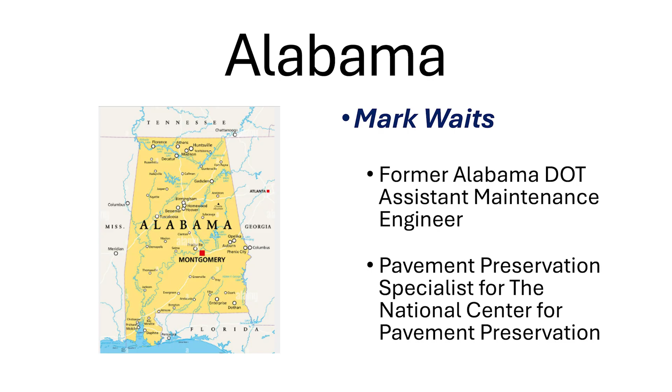And I am Mark Waits. I'm a former roadway maintenance engineer, assistant engineer for the Maintenance Bureau. My responsibility was over all the roadways in the state of Alabama. That includes everything: vegetation, welcome centers, rest areas, you name it, but mainly the roadways.

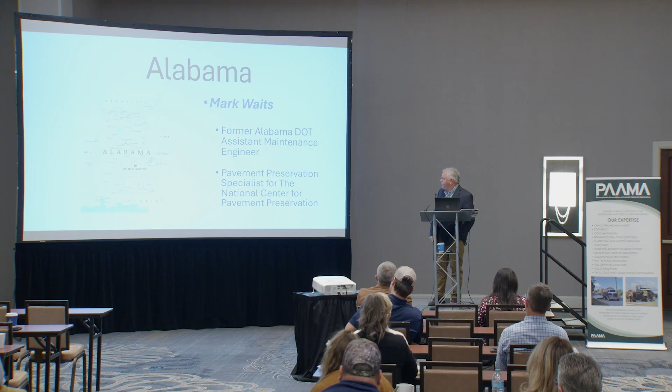So why preservation? What are we in here talking to you about today? Pavement preservation?

When I took the job in 2013, as I said, Alabama really did not have a pavement preservation program. We had a pavement preservation policy, and I'll get to that in a little bit, but we really had no program. I took this job, and you can see the date right here, it's March 20th, 2013, when this article came out.

I walked right into our chief engineer's office, and he said, 'Mark, the director's got this report right here, and he's not happy with it. We've got to do something.' I'm going, 'What report?' And I get to read this article right here, and there we go: 1/4 of the state's public roads are in poor or mediocre shape. I'm going, uh-oh, what have I walked into?

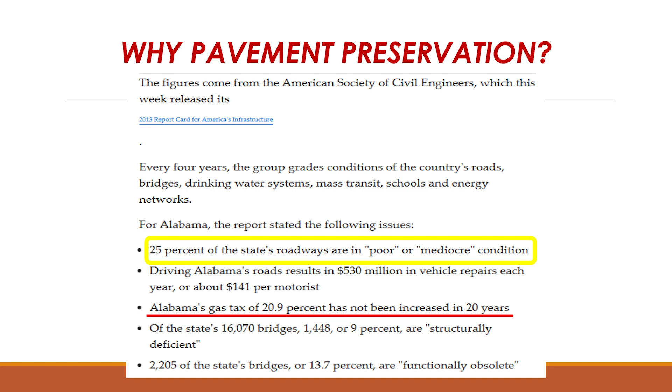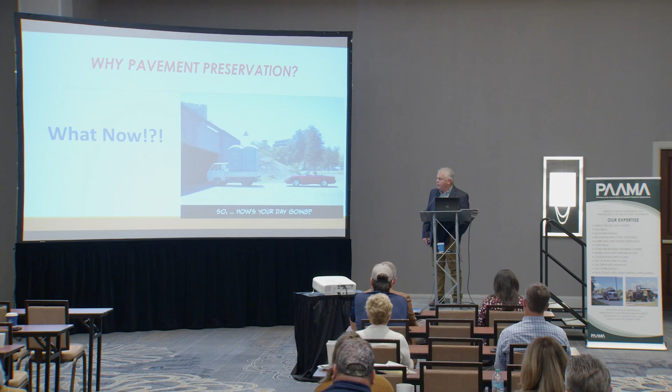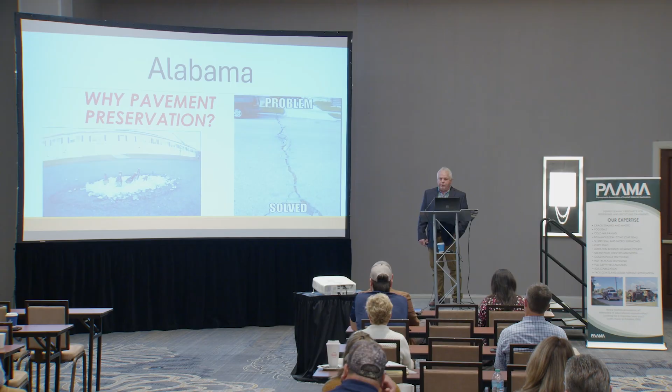So I had to decide, what do I need to do now? Do I just stay on the same road and hope that something bad doesn't happen? Or do I need to make another plan? Could I put a Band-Aid on it? Just get it through for my little short time that I knew I was going to be there, the next 5 or 6 years? Or could I just sit back and chill out and see what happens?

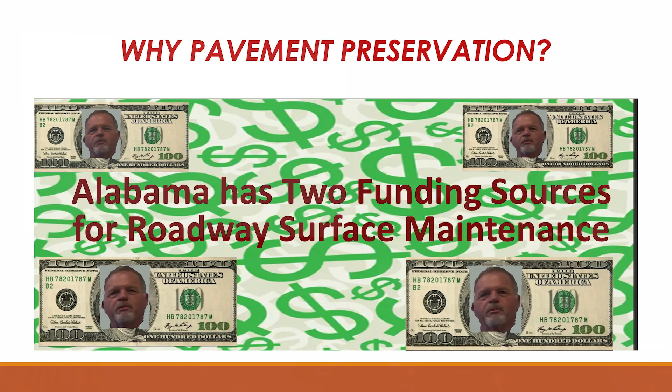Why pavement preservation? You know, the first thing I learned a long time ago is it takes what to make something happen, right? So it actually takes money to make stuff happen, doesn't it?

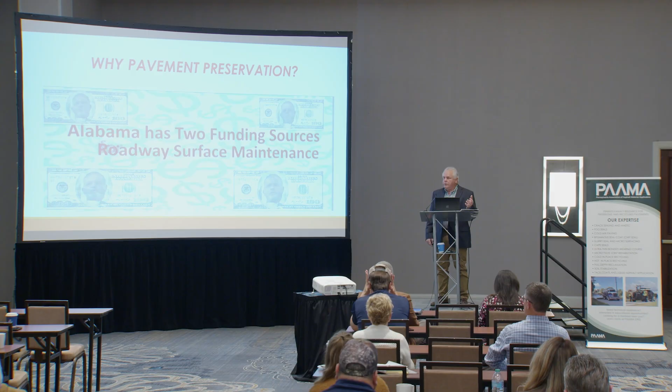Well, as a state agency, how many people here have ever been in a state agency? It takes money, right? And you've got to figure out where the money's coming from and how much you have. We actually had two funding sources for me to do the job I'd been assigned to do, and it had been level funded for several years.

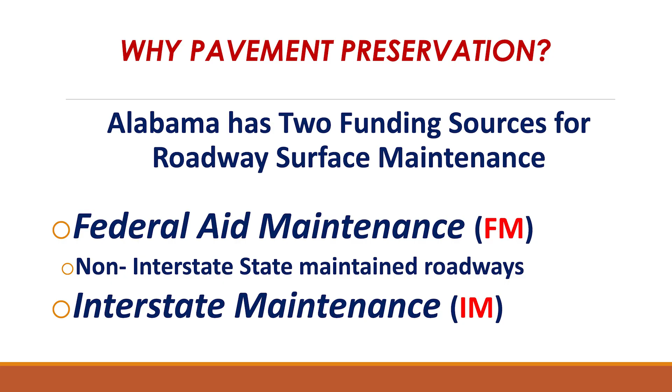Federal, we actually had two programs. The FM, the Federal Aid Maintenance, which looked after all the non-interstate routes or federal aid routes, and the interstate maintenance money, IM, which looked after all the interstate maintenance. Two different pots, but it's really out of one big pot.

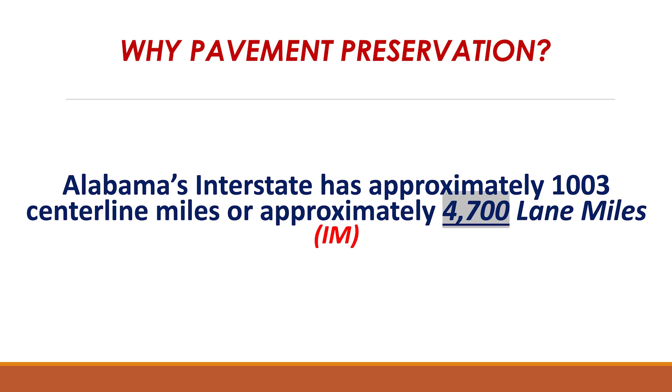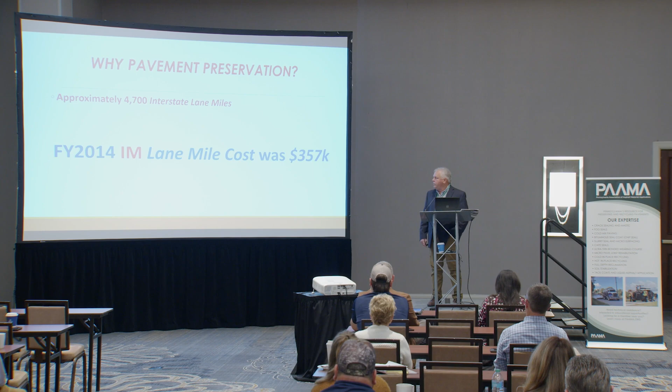Alabama's interstates had about 4,700 lane miles, and in 2014 the lane mile cost to maintain it was $357,000 per lane mile. I sat down for a long time, many nights, crunching these numbers when I first went into position, because you've got to realize what it's costing you to do, and how much money you have versus how much it's costing you. So the interstate maintenance was $357,000 per lane mile.

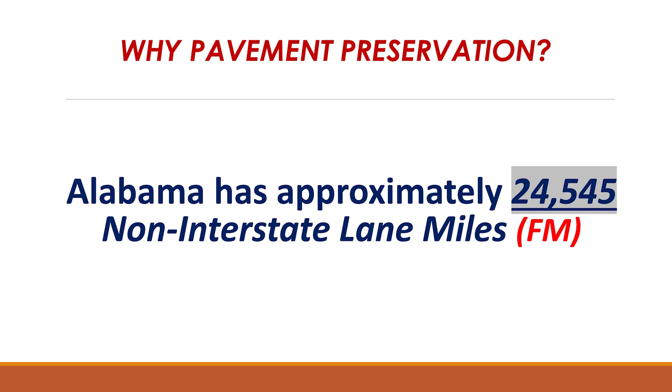Non-interstate, which we called our FM program, was about 24,000 lane miles, and its lane mile cost was $147,000 per lane mile to maintain.

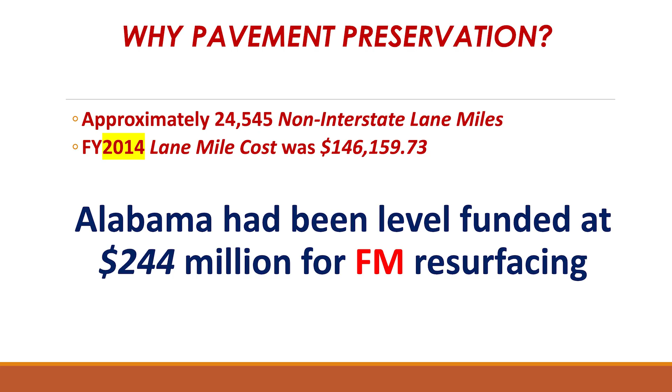Problem with the FM program, the federal maintenance, not the IM, was it had been level funded statewide for $244 million. That sounds like a lot of money, but it's really not when you start separating monies out for each county or each division within the state.

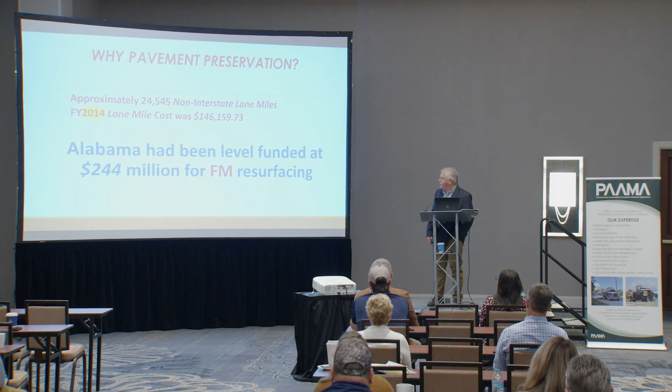So I said, okay, I know how much it cost, and I know how much money I have to deal with. Now let me see how much it would cost me if I wanted to go resurface the roadways in Alabama, the FM roadways, in one year, just to get an idea. And it was $3.6 billion.

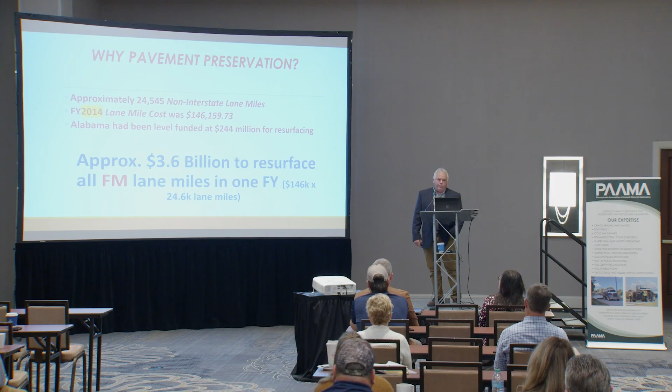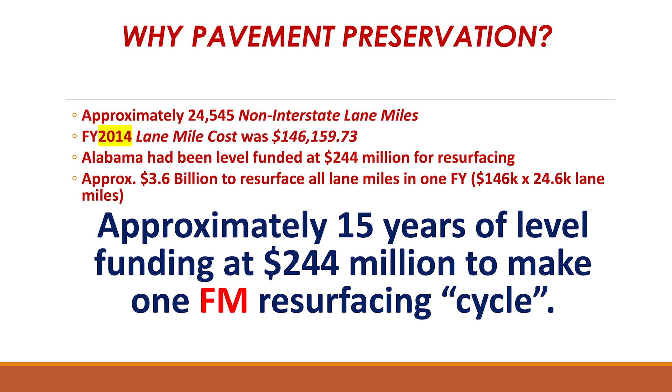That $244 million was not a big number. You thought it was to start with, but it's not. So I said, okay, at the rate of $244 million, how many years would it take me to catch up, to do all the roads? And it turned out to be 15 years. I said, uh-oh.

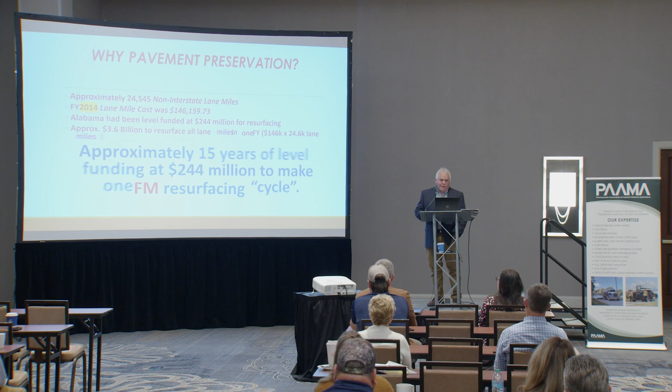How long does a hot mix asphalt or design life last? Theoretically, 15 years, 12 to 15 years. Realistically, maybe 9 years, depending on what the truck traffic is and what your structure value is. So I went, uh-oh, I don't have enough money to do what I'm going to do. No wonder Alabama's in such bad shape, no wonder Alabama's in the lower third of the nation in roadway condition.

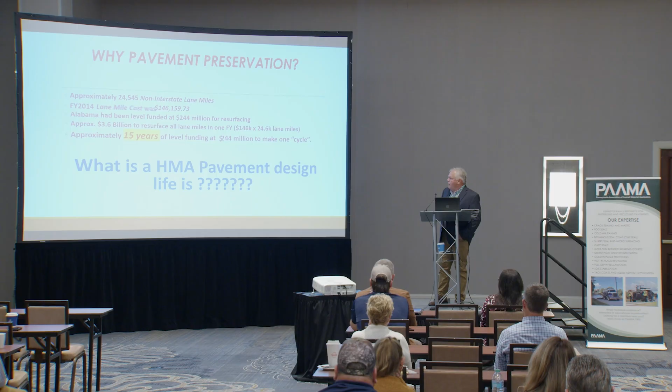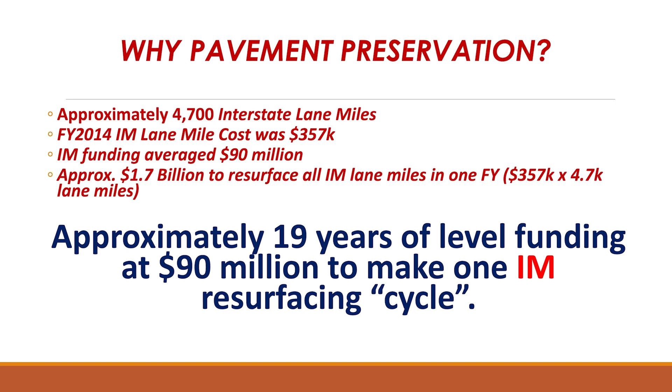So I said, okay, what about my interstates? Well, I've got $357,000 — that's what it's costing me — but I'm getting a pretty good chunk of money out of it, $90 million a year. And I did the same equations. It cost me about $1.7 billion to resurface all of it in one year. But then again, it came out to be 19 years to catch up, just at the rate I was getting the $90 million.

So I didn't have enough money there either. And by the way, the interstate maintenance program, I had to pay for everything else — rest areas, overhead sign bridges, signing projects, drainage structures — whatever, that came out of that $90 million.

I talked to our chief engineer at the time, Mr. Don Arkle. He was very understanding, and he said, well Mark, that is not enough money, when I showed him this. He said, we've got to do something. I said, well, I need a lot more money, I don't need just $90 million. He said, the most I can afford you is $180 million a year, and that includes everything else you have to pay for. I said, uh-oh, that's not enough money.

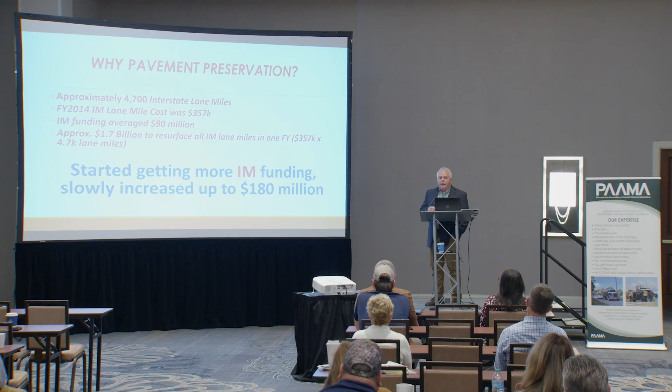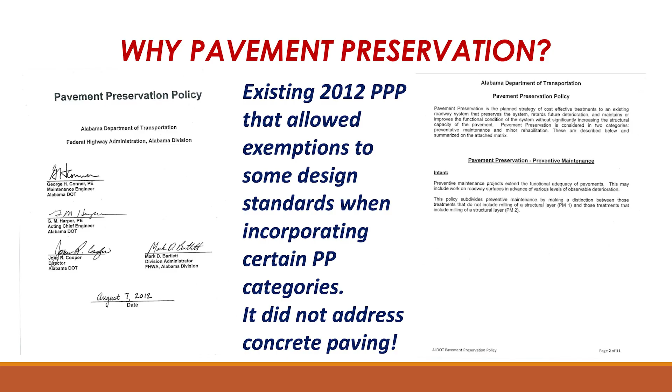Something's got to change, Alabama's got to change. You see, it slowly increased. So I said, Mr. Arkle, our chief engineer, I said, we need to have an understanding — if we want to make a change in Alabama, it's got to start at the top. I need the top management to buy in. I've got a plan from when I was at the lower levels in the district, how I managed my money there with not enough money to do pavement preservation, and I explained it to him. He understood it and totally bought in, and Mr. George Conner, our deputy director, he bought in too.

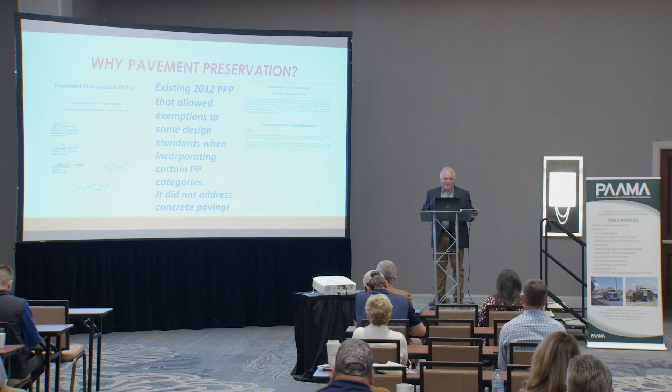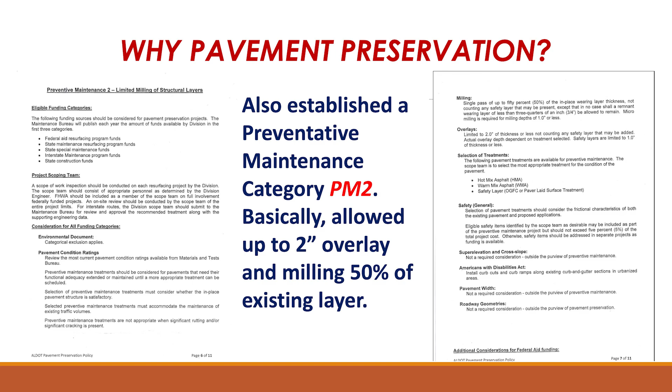Well, at the time I did all this talking, Alabama actually had a pavement preservation policy, which is good, right? It's real good. You got a policy, let's apply it. The problem was, it created a PM1 and a PM2, preventative maintenance 1 and 2. PM1 was basically anything less than a 1-inch overlay, which included a lot of your liquid bituminous applications.

PM2s were basically less than 2 inches. But when I pulled the data up, there were many nights digging up data. In 2014, on the IM program, how many projects did we actually have that were PM1s, your preventative maintenance? Zero. That's statewide.

On the FM side, each region or area was responsible for developing their own paving projects. They did 3, or 2% of the program. In 2015, when I came in, there were 3 IM programs or projects and 0 on the FM side. So they were not using the pavement preservation policy.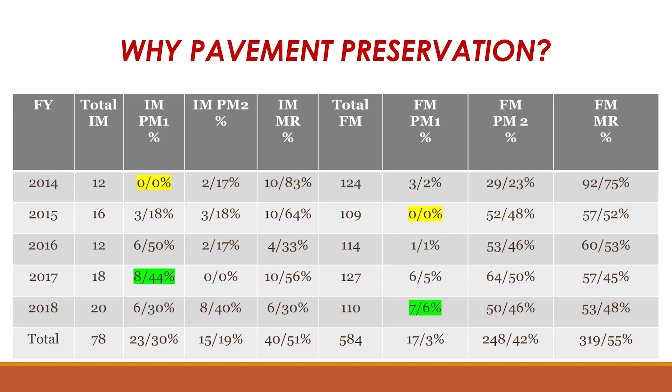I'm wondering why. The pavement preservation policy gave them opportunities to skirt around the federal design criteria, such as clear zones and stuff like that, that they didn't have to address when they did paving projects. But we weren't using them.

You can see when I walked in at 2015 and 2016 on the IM program side, we did 6. 50% of the projects we let that year were pavement preservation projects, and 6 projects are 5%. I started beating the drum to the regions to try to get them to do pavement preservation projects. It increased, and I'll talk about that a little bit later, but you can see the numbers increased.

I hate throwing numbers out to everybody because it gets boring, but if you look at 2015, I broke down the PM1s, PM2s, and MRs, which is minor rehab. You can see we went on the IM side 3, 3, and 10, and on the FM side they had zero pavement preservation projects. We weren't doing anything in pavement preservation.

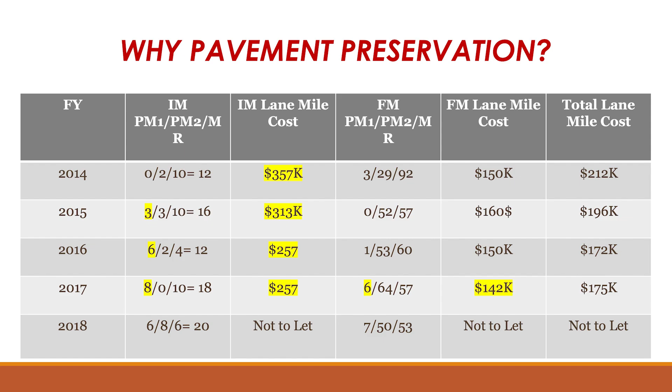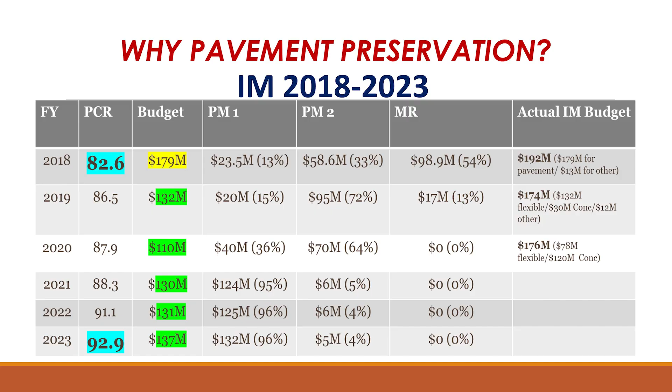After 2017, all of a sudden we started getting a little bit more pavement preservation projects. In 2018, no projects yet, but I expanded this, and you can see on the budgets for the IM side, our budget went from $179 million that we put on paving to $137 million because we were saving money. You could also see that our PCR, our pavement condition rating, which included IRI, went from 82.6 to 92.9. We got better roads.

I caught somebody's attention in the regions. All of a sudden, the regions started saying, hey, this is working. And they said, we want part of it. It's saving money, it's improving our roadway conditions.

On the FM side, we went from 7 projects in 2019 on PM1s and PM2s, which is pavement preservation. You can see the shift went from the mill and fill, which is the MR, to doing pavement preservation. The guys started seeing that this was actually working, and it was saving them money, and they were getting more miles for their dollar.

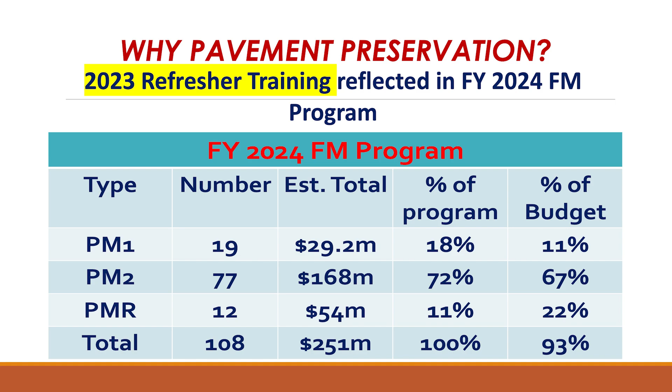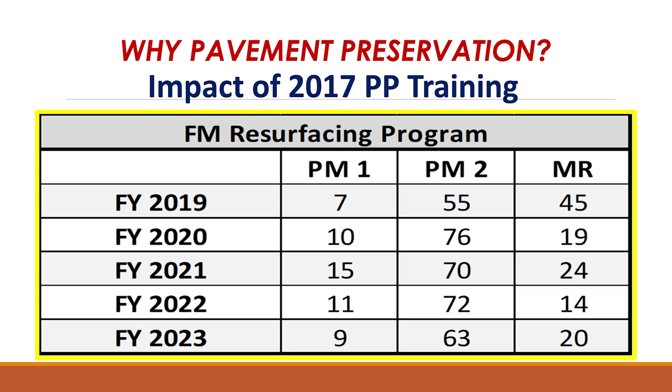So I said, we need to do more training. So before I left, wholesale throughout the state, we did what I called around the world tours, and we did another training. And there again, after the training, we went from 9 to 19 projects and 77 PM2 projects. I said, yeah, I'm leaving the department in good hands.

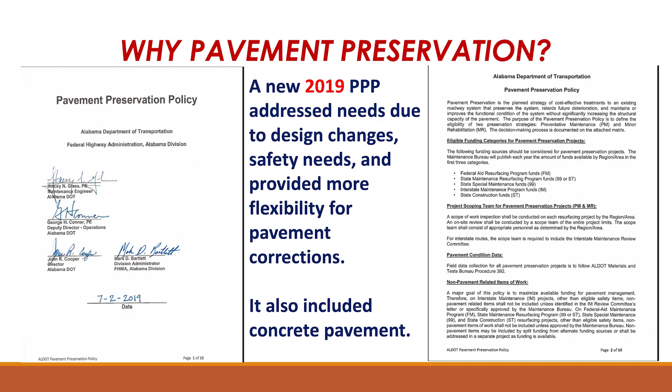And to supplement the efforts, we revised our pavement preservation policy. NCAT had a lot to do with this. We looked back and said, okay, what do we need to do? What's the best approach as far as the materials, the milling, and the applications? And we included all these into our pavement preservation policy.

And when we did all this, if you recall, the article in 2013 was from AL.com. It said that we were in the lower third of the nation. Same publication came out in 2023, and all of a sudden we had the third best roads in the nation. I'm proud of that. That's not just one article, maybe somebody's shaking hands at night saying 'oh yeah,' but all of a sudden it's more than one article. The same year, Consumer Affairs came out and said Alabama is up there, number 2.

And what's really cool about this particular article, if you read in there, it says a guy in Huntsville said 99% of the roads I travel have few potholes. And what that tells me is this guy, he's just a public dude, he's just being interviewed. He's saying he can live with that one pothole.

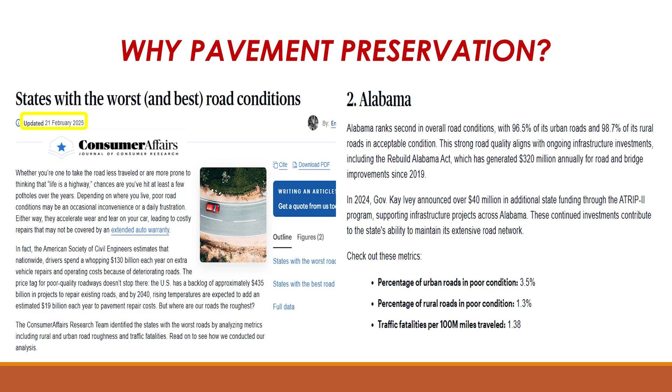So, with that, I told you to be short and sweet. Anybody have any questions? I'd be glad to answer them.

Man, I must have done a great job up here today. Great job. And I didn't even need an interpreter for my southern slang, did I? All right, all right, thank you. Thank you, Mark.

So now we're going to talk—and we designed this because we wanted to speak to PennDOT, and they will get this. The fact that what he did, what they did, with his help, is amazing, and more people just need to hear that message. Just like you said, those bad roads are not going to get any worse, and they're not going to get any better. You just got to keep them safe, put your money into your good roads, and pretty soon, as an agency, you're not turning money back, but you're using it for other things. And that's our whole message here at PAAMA and for what we do.

So again, this is New Jersey, a little bit shorter than where we came from. Mr. Robert Blight, who's with the New Jersey Department of Transportation, gave most of this information, or all of it, at the Northeast Pavement Preservation Partnership. I've just pulled a few slides out of it, just to see how another state did it, and they were kind of in the same boat.

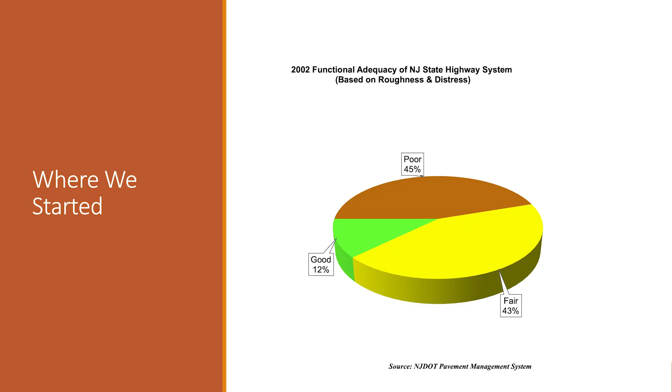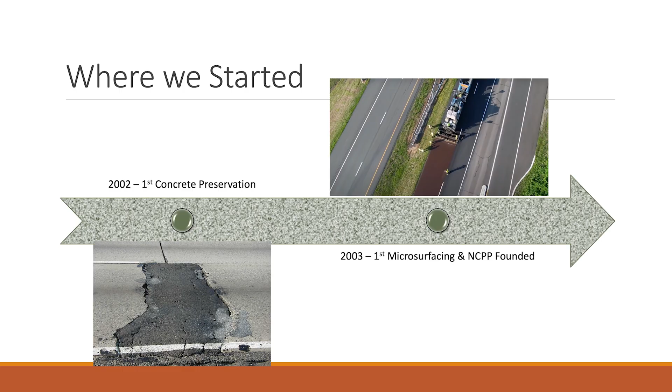In 2002, they had 45% poor, 43% fair, and only 12% good on their road network. That's not too good, so they decided at that time they needed to start doing something different, just like Mark did. In 2002, they started in on some—at that time they had a lot of concrete pavements they were dealing with. So they started working on that 1st concrete preservation, and we're not going to get too deep into that.

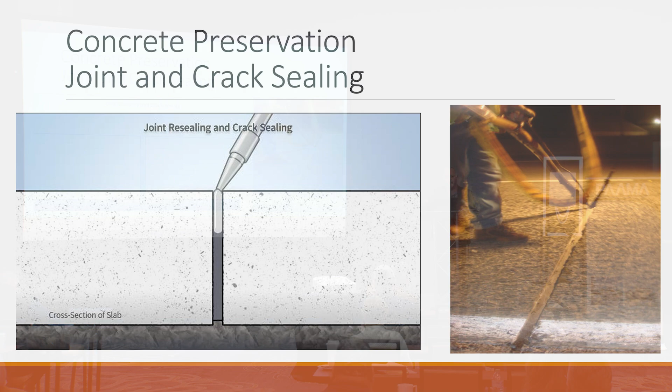But that was also the first time, in 2003, they used microsurfacing in their program. They mentioned that it was also the year the National Center for Pavement Preservation was founded. Then they started working on those concrete roads, and this is something that we do as PAAMA—joint and crack sealing. They figured out that was extremely important to keep those concrete roads in good condition as long as they could. Their microsurfacing, obviously, is something we all know about.

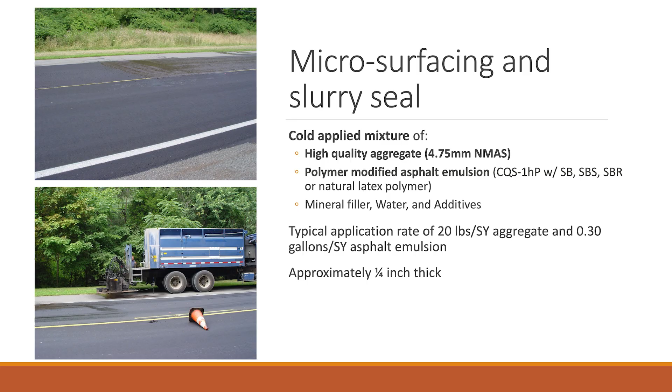Their microsurfacing program grew from 2003, and they were doing that with a high-quality aggregate, polymer-modified emulsion—roughly 20 pounds per square yard of aggregate and 0.3 gallons per square yard of emulsion. So that was one of their major processes used in their pavement preservation program.

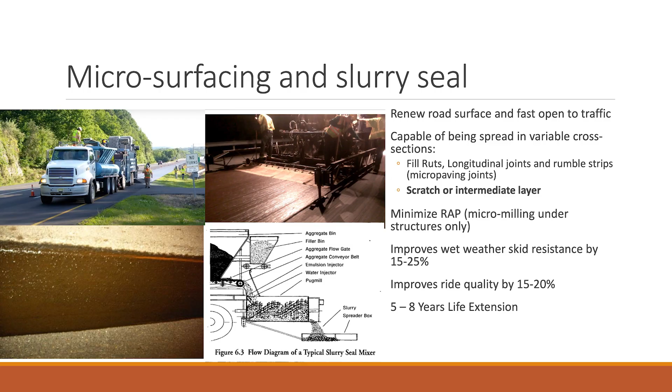We've all learned today about what it's good for. They were using it to renew the road surface. They liked it because it was fast to open to traffic, capable of being placed in variable cross sections. It can fill ruts, longitudinal joints, rumble strips, and they can do a scratch or intermediate layer before they do a hot mix overlay. So it was really good for their program.

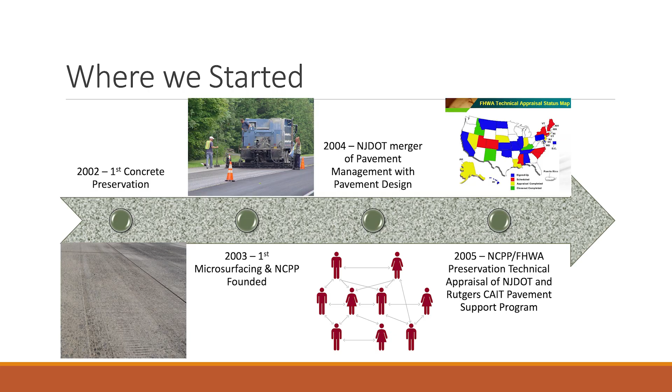Moving forward, in 2004—I think this was something really big New Jersey did—they merged their pavement management and pavement design groups. Before that, you had two different groups, and design was probably building things that were tough to maintain, and pavement management's going, what are you guys doing? Well, we're doing what we're supposed to do, we're supposed to design roads. Well, we can't fix those roads. So by merging those two groups, they had the same goal: they needed to design pavements that they could preserve and make last longer. I think if Robert were here, that's probably what he'd say was one of the biggest things they did—merging those two groups.

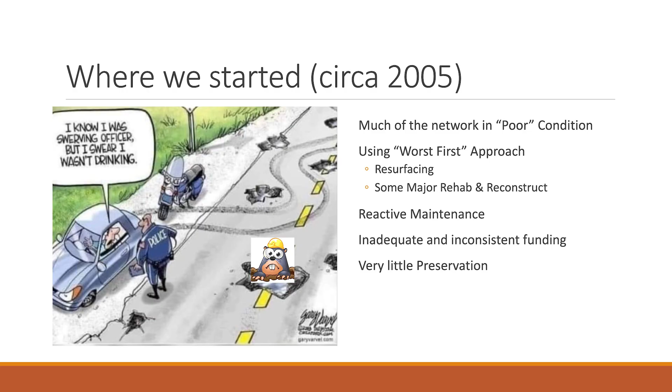So much of their network in 2005 was in poor condition, and they were using the worst-first approach—major resurfacing, some major rehab, and reconstruction. They were doing reactive maintenance, and they had inadequate and inconsistent funding. They did very little preservation, and their roads showed it.

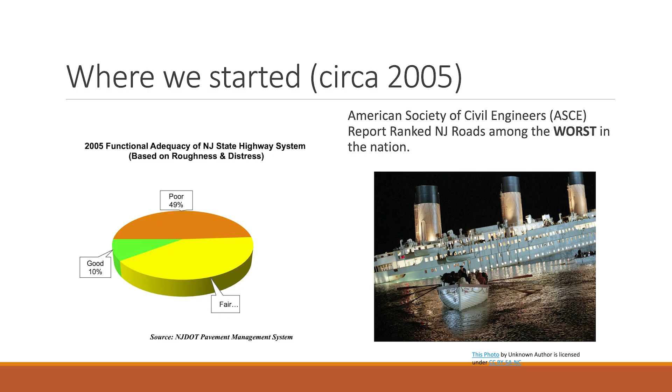So there's that same graph that we saw, and they knew it. They were sinking. They had a sinking ship, and there's lots of DOTs that see that when you start running those numbers that Mark did, and you go, oh, now it would be probably $6 billion to do what you had to do back then. I need $6 billion. I'm not going to get $6 billion.

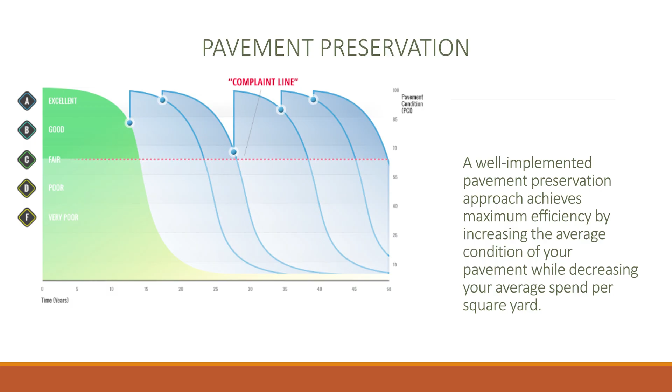What do I do? And that's what New Jersey came through. So they decided to implement a pavement preservation approach so they could achieve maximum efficiency and increase the average condition of their pavement while decreasing the average spend per square yard.

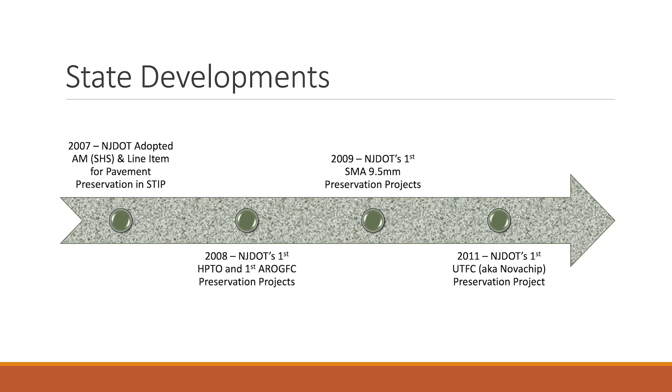Then what I think is very important is they put a line item in their budget for pavement preservation. I tell this story a lot, but back when I was a contractor working in Texas, if Texas had a hurricane that year, if Texas had a flood, or if any event happened in Texas, well, pavement preservation was the last stuff to go to letting. And they would go, yep, we don't have any money for pavement preservation this year because we spent it all on salt or this or that. Well, with a dedicated line item in that budget, that really helps an agency work this process through.

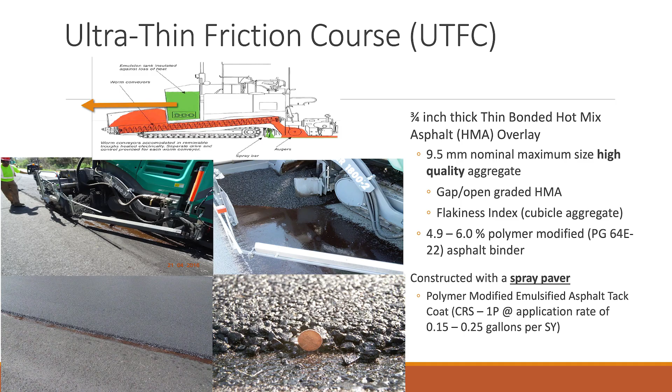They were also working at designing new mixes, new processes. Their HPTO overlay, which Ken could probably tell us all about. They're working on some SMA mixes. Ultra thin bonded wearing course is becoming big for them. So they're making changes. They call that the ultra thin friction course, same as the Novachip, and they were being very successful with that product in their pavement preservation program.

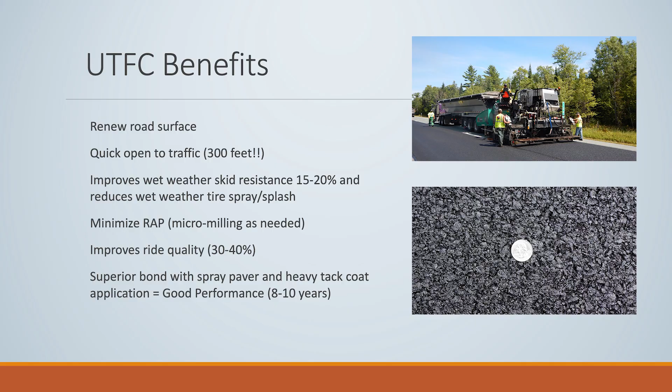They liked it because it gives them a renewed road surface. It's a quick open to traffic, improves wet weather skid resistance, 15 to 20%, and reduces wet weather tire spray, so that's very important for the driver.

It minimizes their RAP. That's one thing they were also looking at. When we mill and fill, and we mill off 2 inches and we only put back, if we're using 20% RAP, what are we doing with all these piles of RAP? And so that minimizes. There's only micro milling. They're not producing that much RAP. That's saving the department as well. And they like the bond with the spray paver.

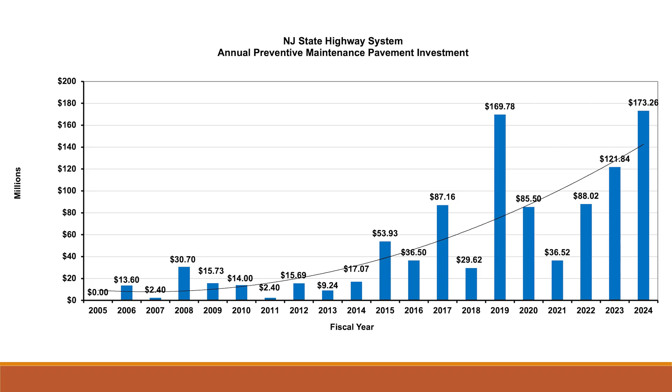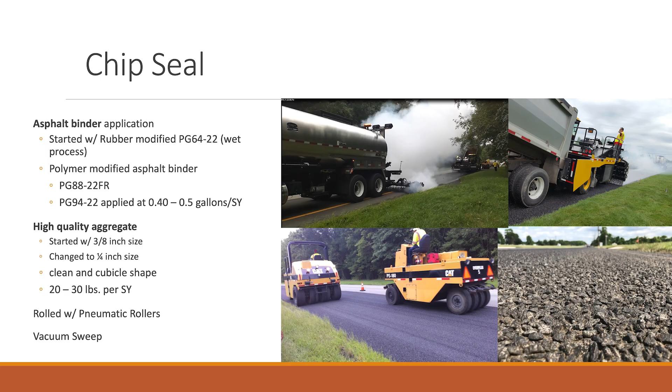So you can see here, this is kind of an interesting chart. This is their investment every year from 2005, which was $0 in pavement preservation, pavement maintenance, preventive maintenance, up to 2024, where they invested $173 million. And so we watched that progression of spend on pavement preservation. They were doing that with chip seals, rubberized chip seals, using high-quality aggregate, high-quality modified asphalt. That was good for them.

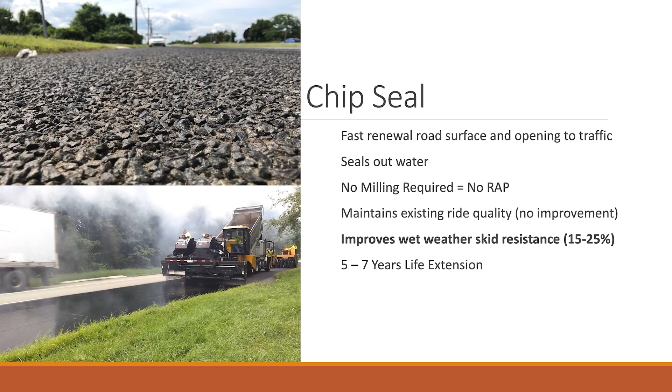They like that. It's a fast road surface. It's easy to do. It's open to traffic, seals out water, no milling required at all. And it doesn't give you an improvement on your ride quality, but it does improve their wet weather skid resistance. And gives that 5 to 7 years of life extension, so it gives them 5 to 7 years of not having to worry about that road.

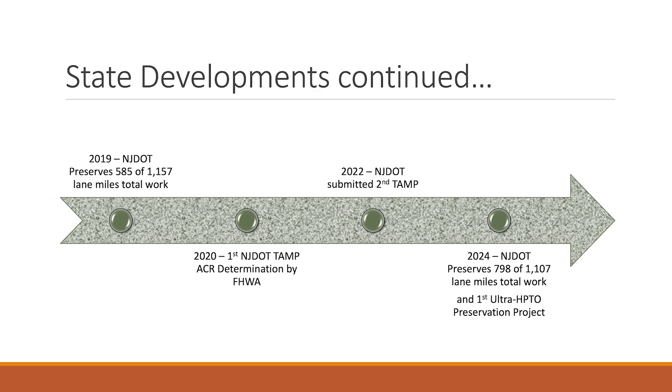So they continued on, and in 2019 they preserved 585 of their 1,157 lane miles. They worked on their TAMP, which is the Transportation Asset Management Plan, and got that through and submitted. In 2024, they preserved 798 of 1,100 lane miles, and they started using their Ultra-HPTO mix.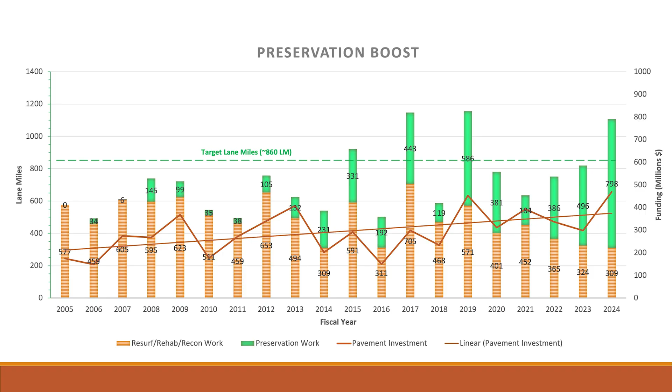And you can kind of watch that. Their targeted lane miles a year, that's the dashed line, was 860. And as they do more preservation, they're getting closer and closer to that target, and in some years all the way above it. So again, this is for when we're out there talking to our small agencies and PennDOT about pavement preservation. These are tools that you can use to show them.

I like this slide, and it took me a while to get this little thing, but what he's talking about is: you've got your deficient pavements here, so you have to rehab them, and then you take them up and drop them into this funnel, and they work their way through, and pretty soon they're deteriorated. You just got to keep doing it.

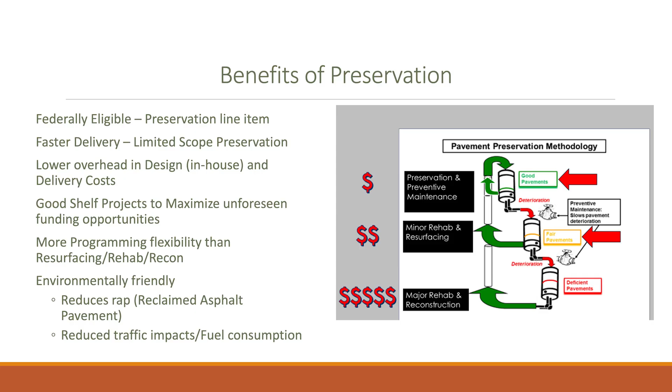But if you come in here and hit that funnel, and instead of letting it drop out the bottom, you put a pavement preservation on it, you keep these roads spinning up here in good condition while you're fixing these others. I'm going to steal that one because I do like that.

So the good thing is for them, it's federally eligible. The preservation line item has that, so they can use federal dollars on it. It's faster delivery, quick projects, lower overhead, their design is easy, delivery costs are inexpensive. They can have a lot of projects on the shelf, so at the end of the fiscal year when they need to spend some money, they've got preservation projects on the shelf. They can pull them off, call a contractor, and go get some roads fixed. A lot of programming flexibility.

Again, these are quick-hitting, easy projects to do. And they're environmentally friendly, so they reduce that RAP that they're pulling off the road, and they're reducing traffic tie-ups. You're on the road a lot less time.

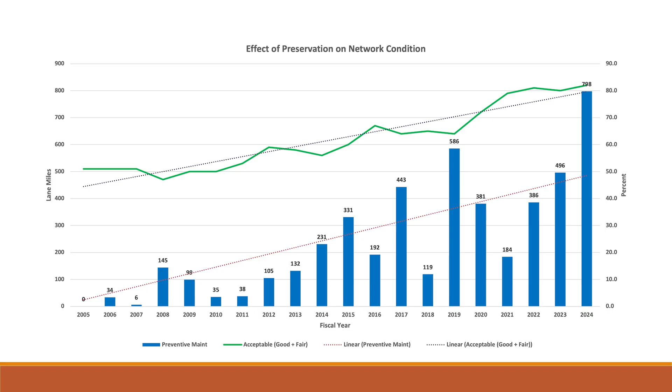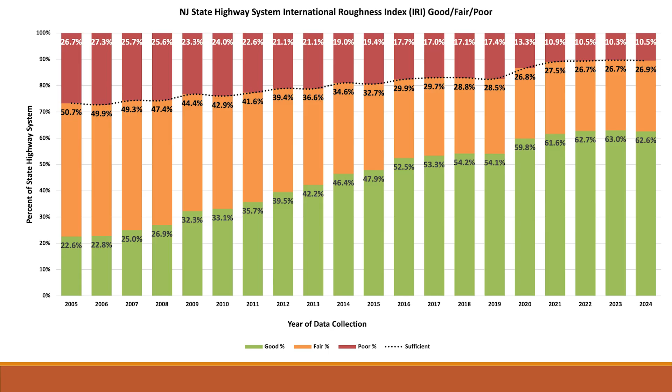So one other quick thing, this is kind of that effect of preservation on their network condition, and you can see that their good to fair status is climbing throughout the years, and that's exactly what we want to see. And their IRI: percent of good IRI improved from 23% to 63%, and their acceptable increased from 73% to 90%. Just tremendous things that they've done.

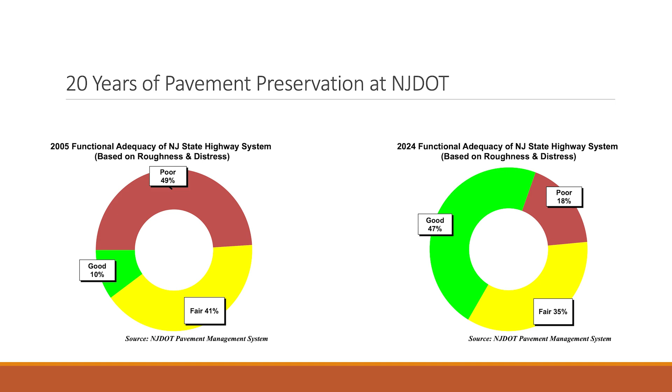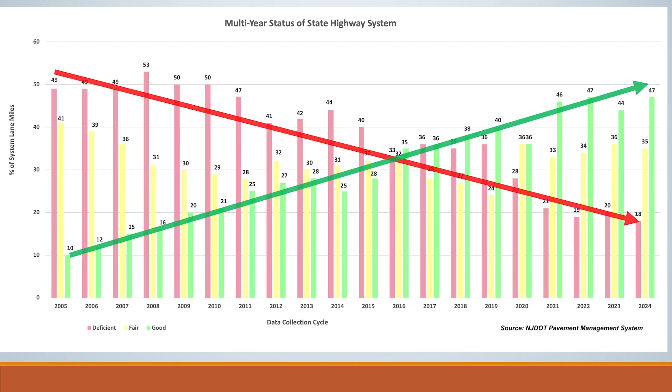And here's another way to look at it: in 2005, 49% poor; by 2024, 47% good, 35% fair, and only 18% poor. And that's in a 20-year stretch. Another good set of numbers to see - you can see here how the poor drops, crossing with the good going up the other way, and they crossed there at 2016, continually making their road system better.

So I want to thank Mr. Blight. I wish he could have been here - he could have done this a whole lot better than me. But NJDOT was a success, just as Alabama was a success, and how we want Pennsylvania to be a success as well. So any questions or comments on that?

Yes, Mark? I'd like to make a comment.

You've got to make sure the training is there. The training is very important when you start dealing with agencies. I know there's not a lot of agency people here, but when you're dealing with agencies, you've got to understand their mindset - that they're going to spend that money whether it's the right thing or wrong. Let's make sure they spend it on the right thing. Make sure they do the right application at the right time and the right way. I just want to stress that.